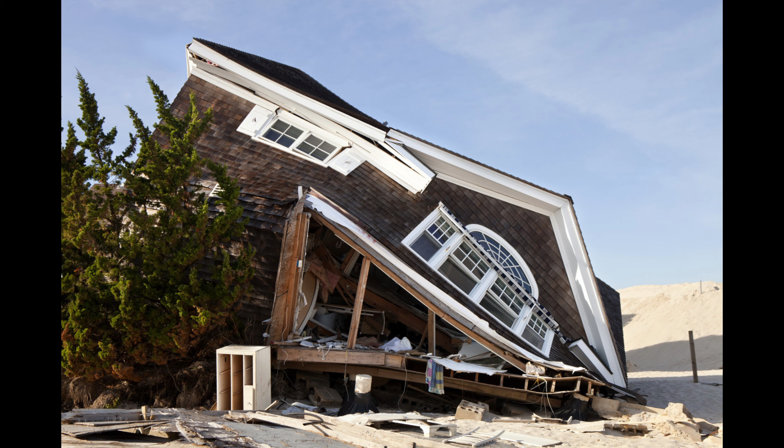When mitigating wind damage, the very first thing you can do to reduce damage to your home, and thus make it safer, is make sure that your home is structurally sound and harden it where necessary. The first step in hardening your home against hurricanes is to strengthen it against the load that will be applied to it by the hurricane's winds. This is accomplished by creating a continuous load path from your roof all the way down to your foundation.

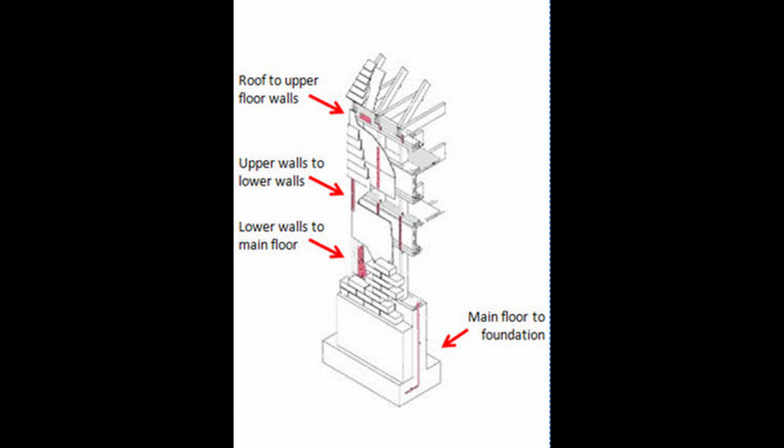This is done by attaching metal brackets and straps to studs and rafters using anchoring bolts, securing your roof to your upper walls to your lower walls to your main floor, and your main floor to your foundation. This will transfer the load the wind puts on your house into the ground. Roofs are a common failure point during a hurricane, and once the roof is breached, wind can more easily destroy the rest of the building, even if it has a continuous load path.

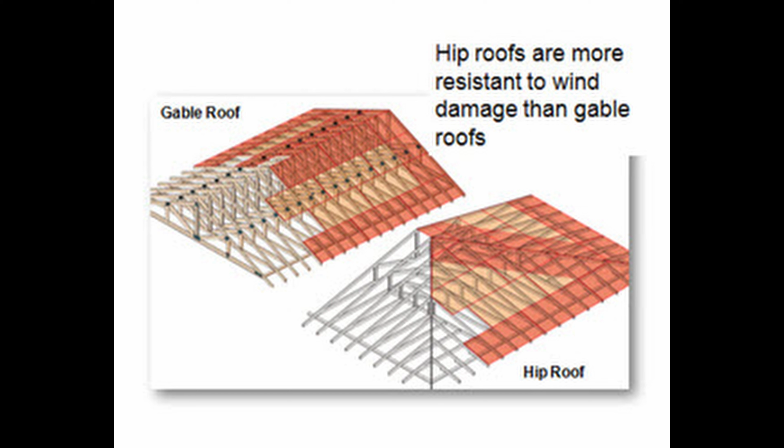So the next most important thing you can do to harden your house is make sure that your roof is structurally sound. Roofs come in two types: hip roofs and gable roofs. Hip roofs are sloped on all sides, thus having a lower profile and generating less wind resistance. So if you're buying a new home, building a new home, or replacing your roof, you'll be best served by a hip roof if high winds are a significant concern in your area of operations.

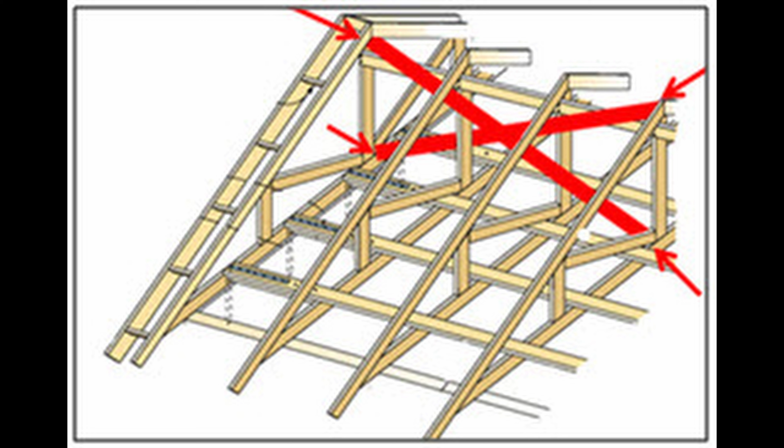Gable roofs are only sloped on two sides, and thus have more surface area that generates greater wind resistance. Gable roofs are prevalent and may be necessary where excessive snow buildup is a major concern. If you have a gable roof, it can be reinforced by bracing its frame. Gable bracing often consists of 2x4s placed in an X pattern at both ends of the attic.

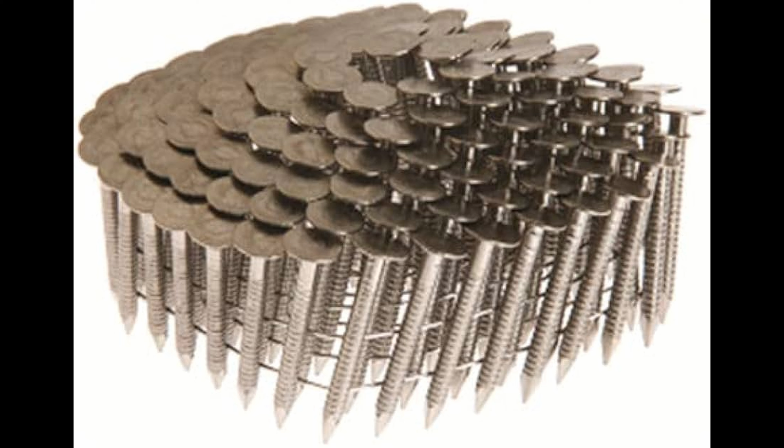But whatever type of roof you have, it would be in your best interest to have a certified home inspector confirm that whatever material your roof is made out of is properly layered and affixed to stand up to high winds, as well as complying with all applicable building codes. Also, specifically ask if your roof was constructed with stainless steel nails if you're within 3,000 feet of salt water.

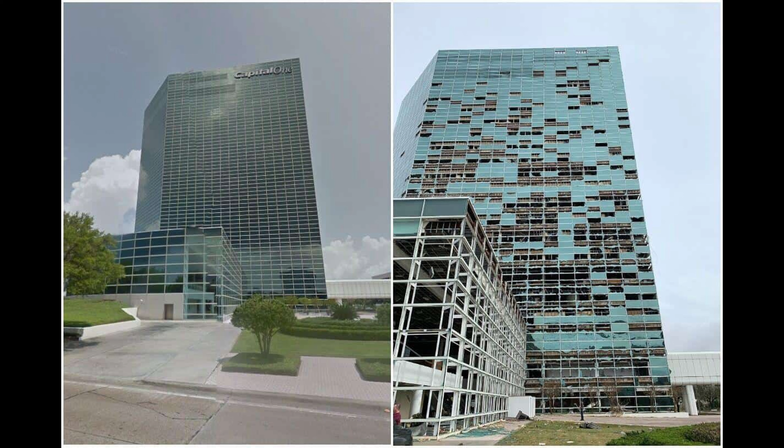Next up for hardening your home is reinforcing your breach points. And a lot of this stuff is not only effective at protecting against winds from both hurricanes and tornadoes, it's also effective at protecting against intruders as well. Exterior doors and windows are the weakest part of a structure's outer shell.

If they're broken or blown in during a hurricane, high winds can enter a structure, exerting pressure on the roof and walls, resulting in serious damage, if not total destruction, as well as letting in water and debris that can further damage the building and the people inside.

Your garage door is the largest potential breach point on your house. Reinforcing your garage door with metal bars and brackets will help protect the garage and its contents, as well as the entire home structure by increasing its resilience to high wind pressure.

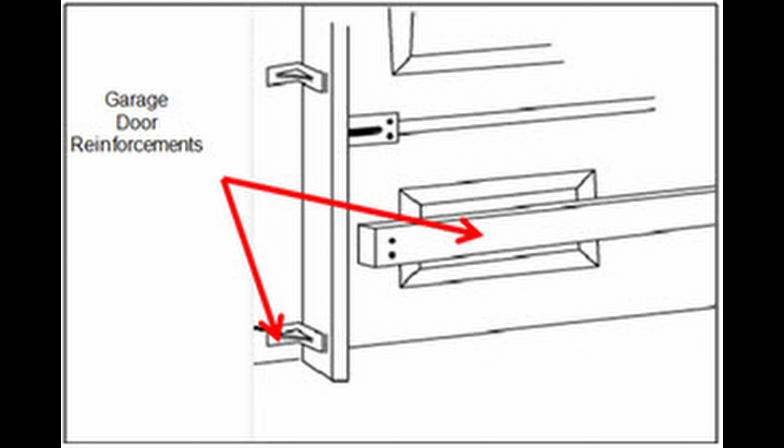Double entry doors also pose a serious risk. Any design of double door can be secured with latches at both the top and the bottom of the door to prevent them from being blown in by high winds.

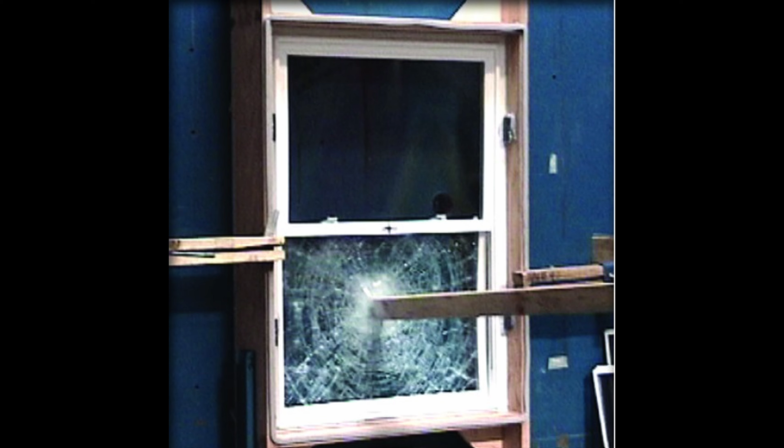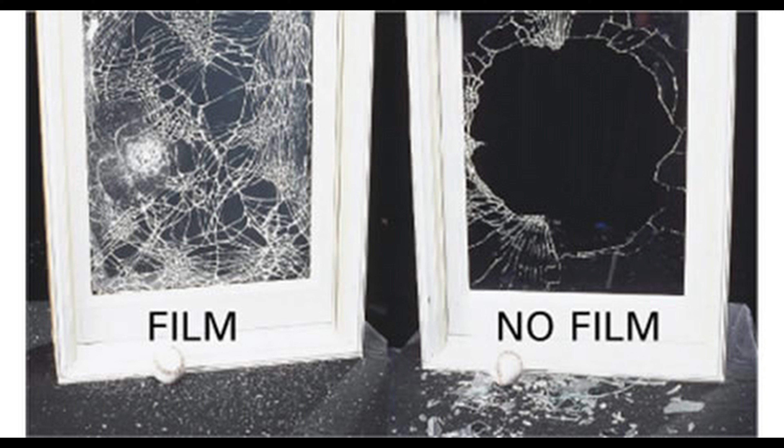Windows are the third largest, but likely most fragile breach point on your home. Windows can be hardened in 4 ways. The first way is installing impact-resistant windows made out of materials like acrylic or polycarbonate. The second way is installing ballistic film over the current existing windows. The high-end versions of these films can even make your windows bullet-resistant.

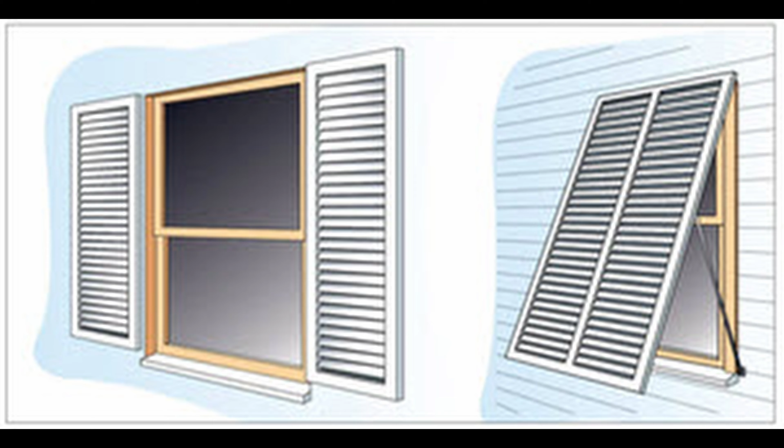The third way to harden your windows are with functional shutters. These range from wood shutters that can close over the glass windows and securely latch, all the way up to rolling metal storm shutters that lock into place.

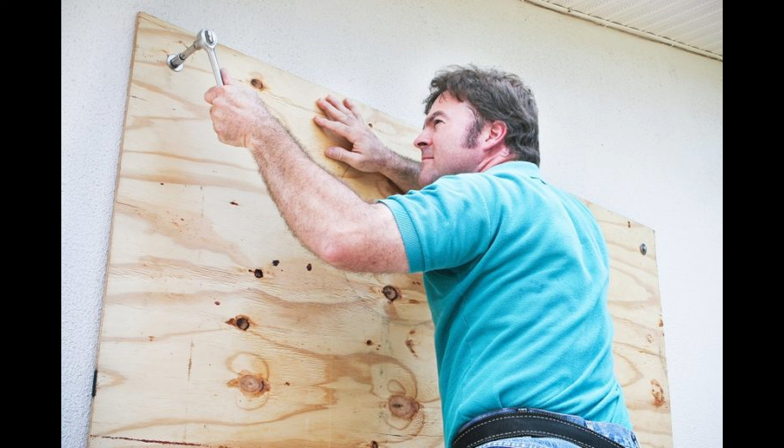The fourth and final way to harden your windows, if a storm is coming and for whatever reason you didn't take advantage of any of the previous methods, is good old temporary plywood coverings. But if you need to resort to this method, just make sure that you use screws or lag bolts long enough to penetrate the wall studs around the window, and not just your siding or wall covering.

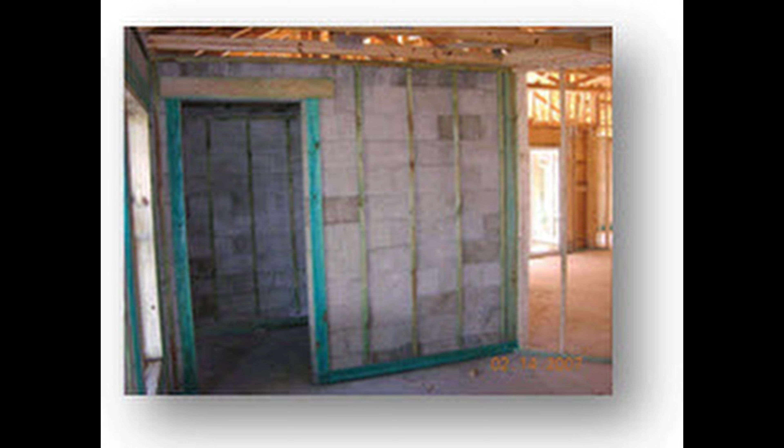Beyond hardening your home, there are a few other things you can do to protect your family and your home from wind damage. First up is installing a storm shelter. A storm shelter built to the standards laid out in FEMA Manual 320, Taking Shelter from the Storm, link in the description, provides near absolute protection against the risk of injury or death caused by extreme wind and flying debris.

However, always remember, storm shelters do not protect against flooding, so always follow flood evacuation orders, even if you have a storm shelter. The next thing you can do is ensure that nothing on your property will turn into flying or falling debris. Trees and unattached secondary buildings pushed over or picked up by high winds can cause damage to other structures during the storm.

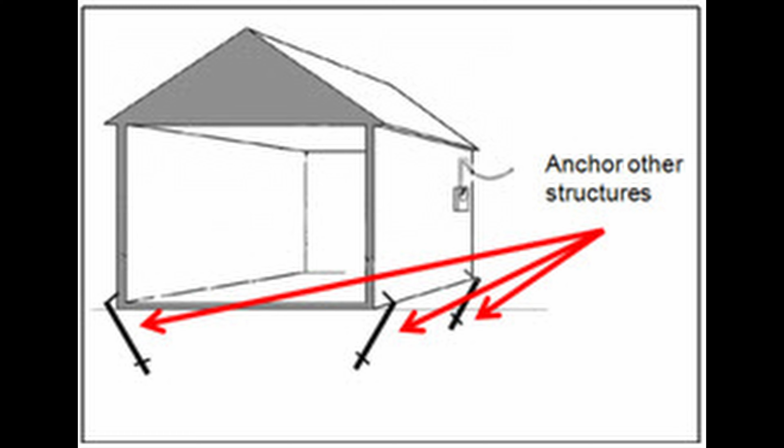Anchoring storage sheds or other outbuildings will help prevent them from becoming flying debris. Anchor straps like those used in manufactured homes can be used to anchor these buildings as well. Additionally, removing all trees close enough to fall on any building on your property reduces the risk of damage to your home from a falling tree, as well as from an outbuilding being crushed and turned into easily blown around debris. The distance between any building and any tree should be greater than the height of the tree when it's fully grown.

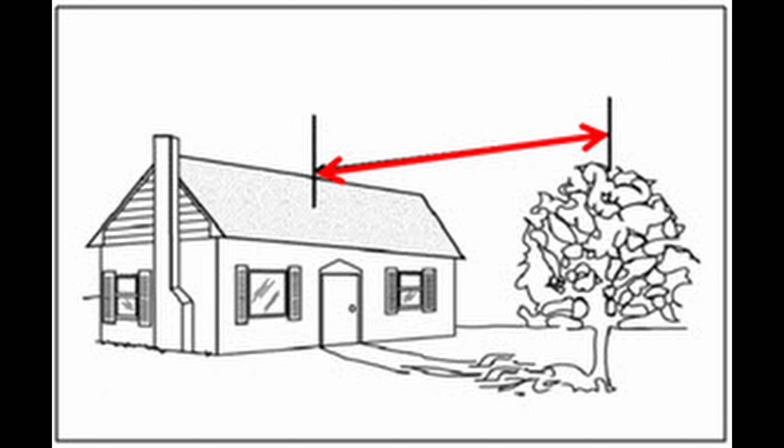Additionally, keeping trees pruned so wind can blow through the branches, instead of the branches acting like a giant sail, can help the trees stay rooted and not fall over in the first place.

Now that we've hardened your home and protected you from falling and flying debris, next we need to talk about floodproofing. By definition, floodproofing describes mitigation measures that decrease the risk of flood damage to structures. Floodproofing measures are generally designed to protect individual components of a structure, not to bring the structure into compliance with a community's floodplain ordinance. And when it comes to floodproofing, there are 2 types: wet floodproofing and dry floodproofing.

Wet floodproofing is any measure applied to a structure and/or its contents that prevents or reduces damage from flooding while allowing floodwaters to enter the structure. Wet proofing measures are typically used to protect the electrical, heating, ventilation, and air conditioning utility components of your house when flooding occurs. Many of these mitigation measures involve elevating equipment above the expected flood levels.

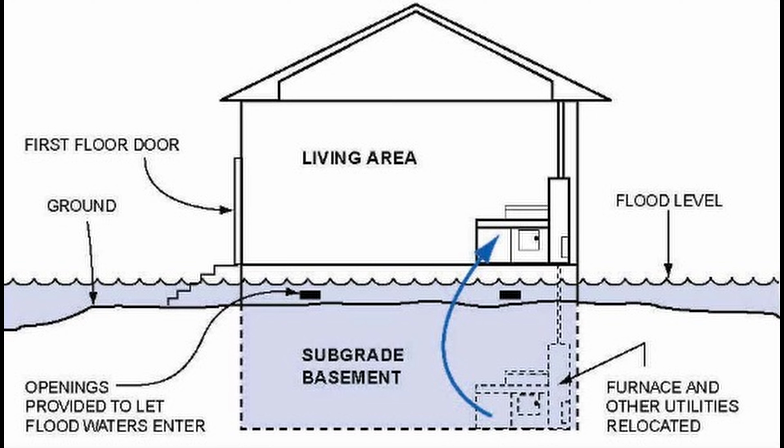Floodwater can easily damage electrical components including service panels, meters, switches, and outlets. Electrical components usually have to be replaced even if they're only inundated for a short period. Furthermore, people don't think about it when there's water everywhere, but short circuits and flooded systems pose a significant risk of setting the portion of your house that's not underwater on fire. This is why it's recommended that if you're evacuating during a hurricane, that you turn off your home's power at the breaker.

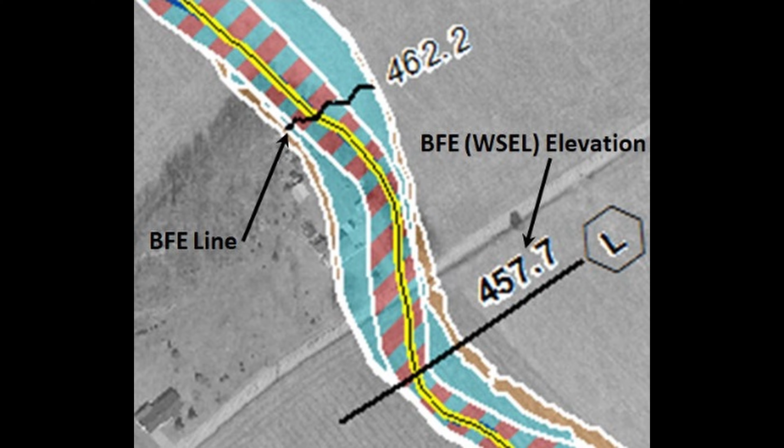FEMA has flood maps that indicate anticipated water levels called base flood elevation, or BFE. The BFE is the anticipated elevation above mean sea level that the base flood is expected to reach. The base flood is a flood that has a 1% chance of occurring in any given year. So check your area's BFE to identify how high you will need to elevate your components when wet floodproofing your home.

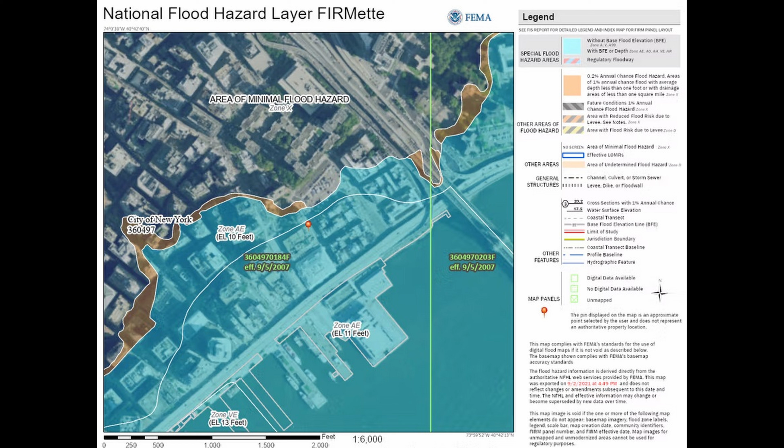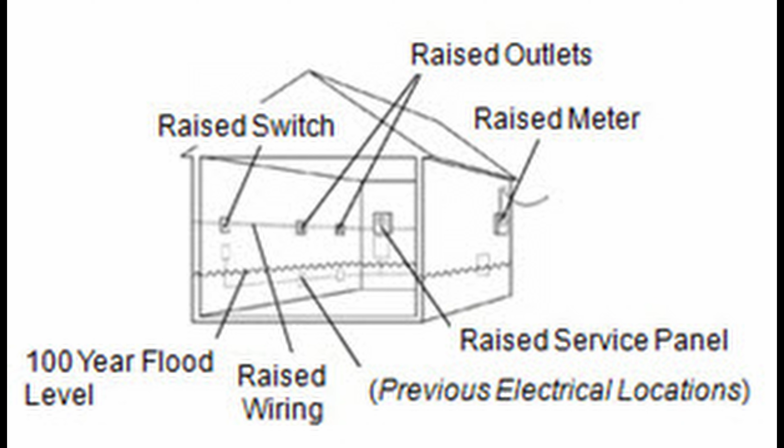You'll want to raise all components of your home's electrical system, including wiring, above the base flood elevation. But the further you raise those components above the BFE, the more you reduce your risk. FEMA strongly recommends only using licensed contractors to ensure that electrical system modifications are performed correctly and in accordance with all applicable codes.

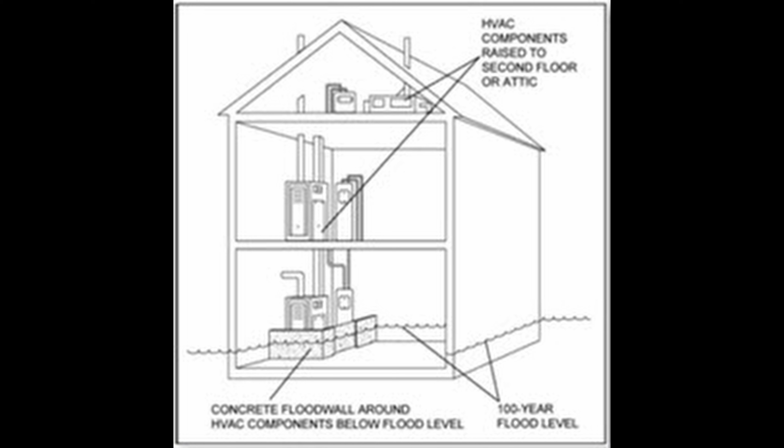HVAC equipment such as furnaces and hot water heaters can easily be damaged or destroyed if inundated by floodwater. So a good way to protect HVAC equipment is to move it to your home's upper floor or attic instead of having it in your basement, where flooding could put them completely underwater. Your ventilation ductwork can also be protected from flooding by moving it above the BFE to the extent possible.

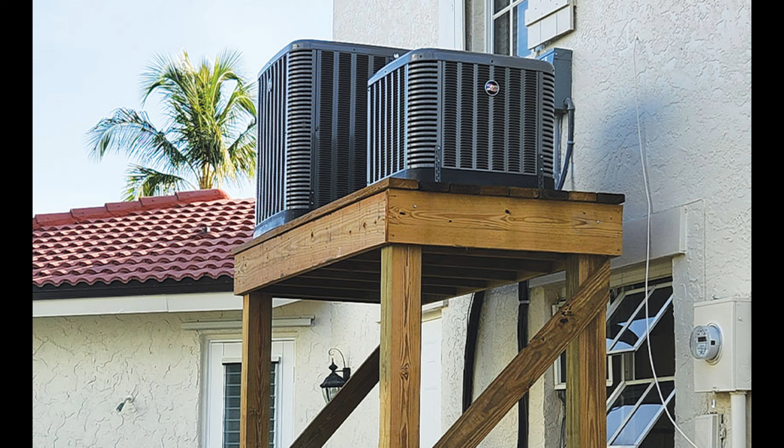In addition to elevating large utilities, major home appliances like washing machines and dryers can be protected by placing them on floors in your home above your BFE. Likewise, outdoor utilities like heat pumps and air conditioners can be protected by placing them on elevated platforms above your BFE.

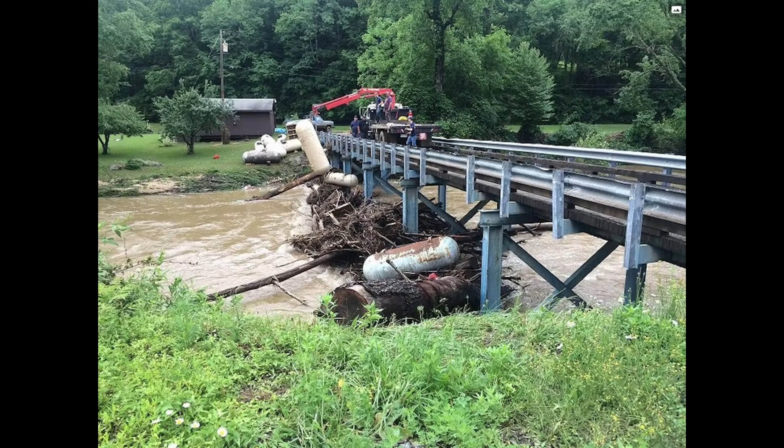Finally, if you have external heating oil or propane tanks, you'll need to secure them by running straps over them and attaching the straps to ground anchors. These kinds of tanks can easily be moved by floodwater, and not only will losing these tanks be a major cost and inconvenience for you, but it can generate a serious threat to public safety.

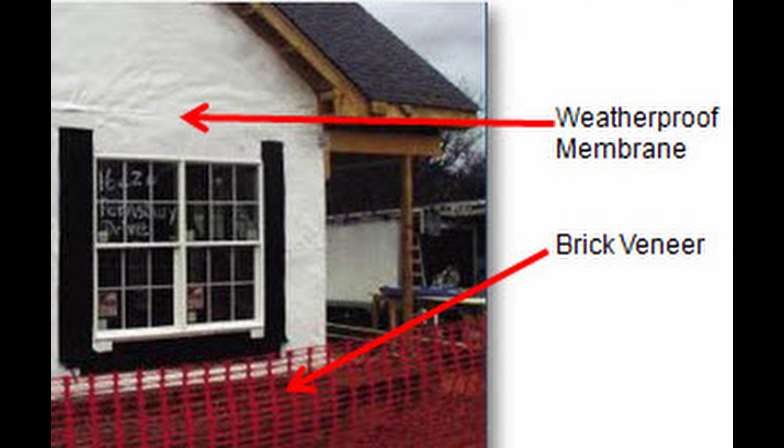Now, as for dry floodproofing, this, by definition, includes measures that make a structure watertight below the level that needs flood protection. This type of floodproofing is often used to protect non-residential structures, water supplies, and sewage systems. An example of a dry floodproofing measure is to apply a waterproof veneer, such as a layer of brick backed by a waterproof membrane, directly to the outside surface of an existing structure.

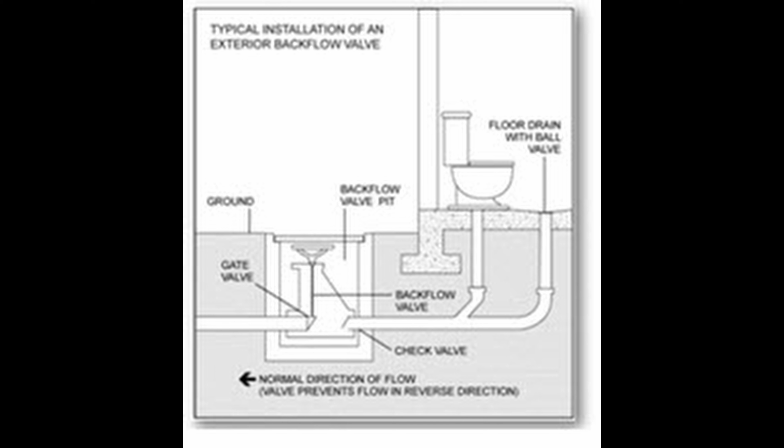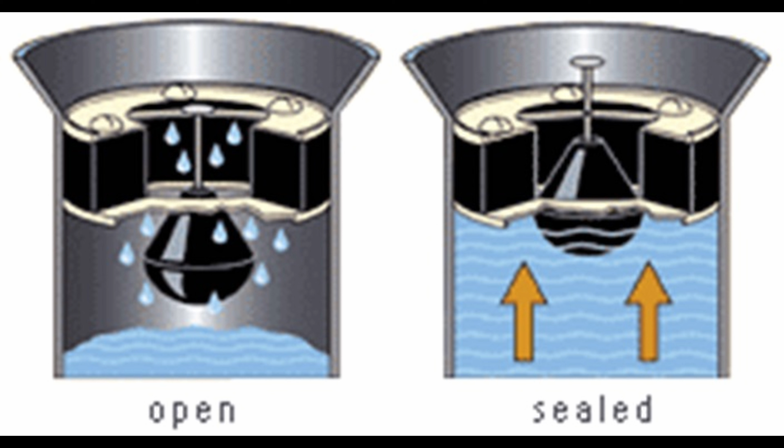Additionally, flooding can cause sewage from sewer lines to back up through drain pipes. These backups not only cause damage that's difficult to repair, but they also create health hazards. One way to protect against this hazard is to install backflow valves, which temporarily block drain pipes if water travels through them the wrong way. If your house's lowest level has a floor drain that empties outside, installing a floating floor drain plug can also prevent floodwater from backing up the drain pipe and entering your house.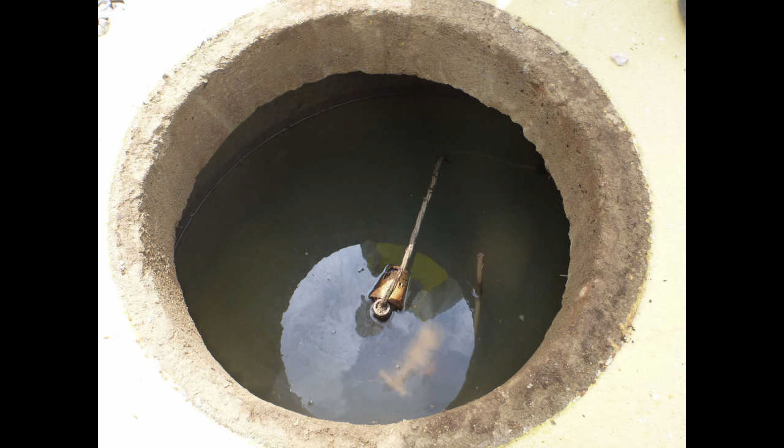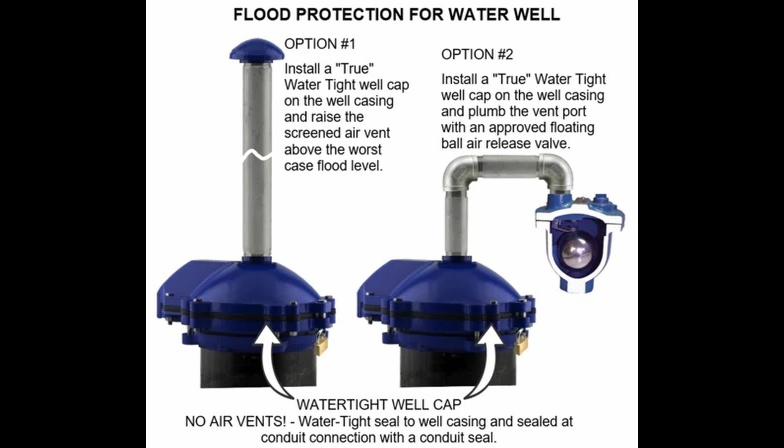Floodwaters often carry hazardous and toxic materials, including raw sewage, animal waste, oil, gasoline, solvents, and chemicals. If your home's water supply comes from a well, floodwaters entering that well can contaminate the groundwater, making the well unsafe. Wells suspected of being contaminated should be inspected by a professional. Proper well construction will protect a well from contamination.

A licensed well drilling contractor can inspect your well and suggest improvements such as extending the casing at least 2 feet above the highest known flood elevation, installing a sanitary seal or cover on the casing, and/or installing a backflow valve in the water line.

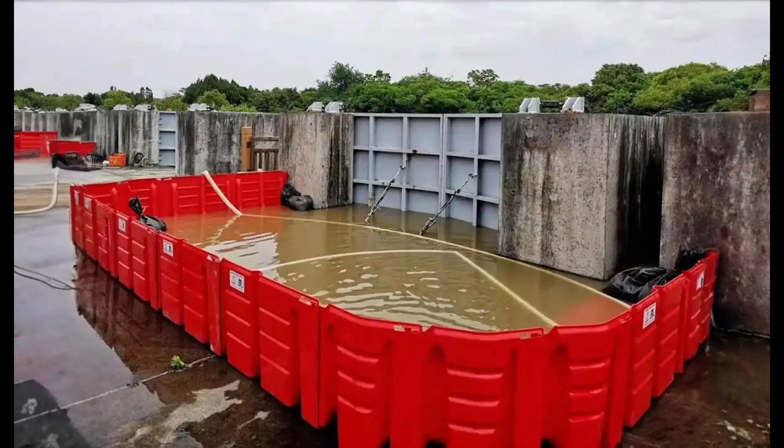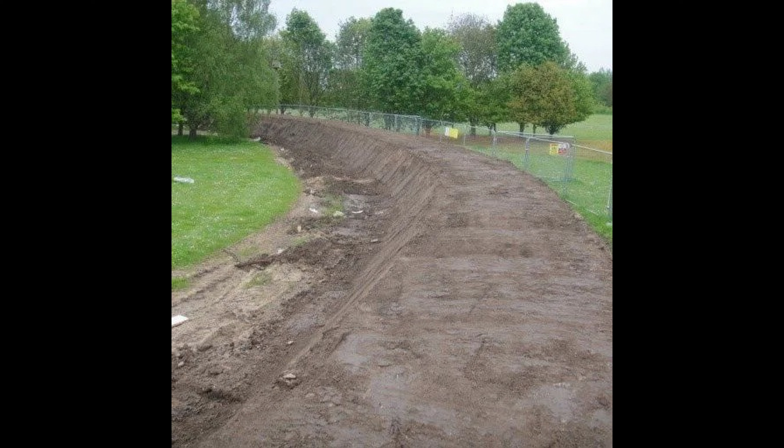The last form of floodproofing you can use is flood control barriers. These barriers include levees, berms, flood walls, and temporary barriers. Flood control barriers protect structures by deflecting the destructive force of floodwaters away from them, and thus can be used to create a protected area around your home. But remember that any of the permanent flood control barrier types will need periodic maintenance to remain effective.

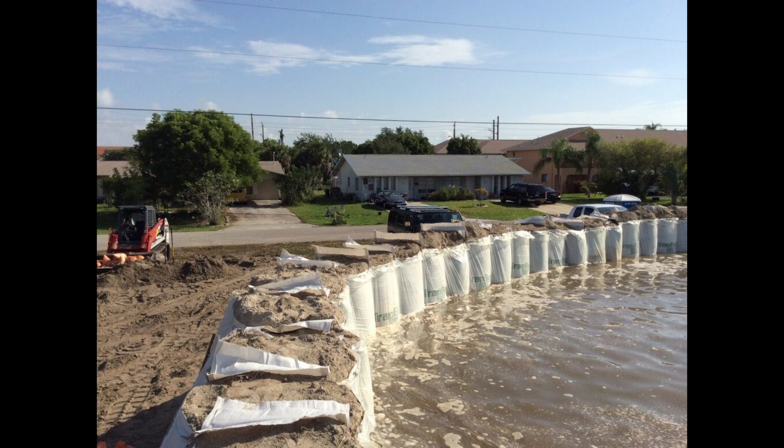You also need to keep in mind that floodwater deflected away from your property may be deflected towards your neighbor's property, causing worse flooding for them, or potentially overwhelming local sewage or drainage systems.

Finally, the last section of FEMA 321 talks about storm surge mitigation. This section really all breaks down to, if you live in an elevated house near the coast, it means you're in the V zone. This means you're at significant risk of damage from storm surge. As such, you need to get a certified engineer to make sure that all of the applicable safety features have been built into your home. And if they haven't, you need to get certified building professionals to bring your house up to code.

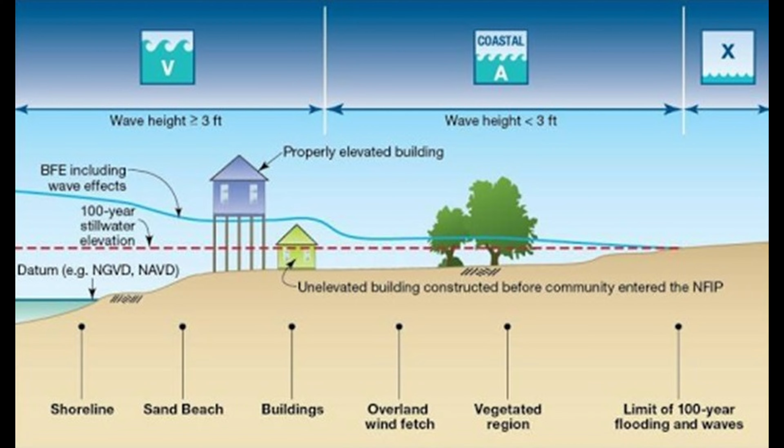So there you have it. If you harden your home against the wind and you floodproof your home against the water, you and your family are far more likely to survive the next hurricane, and your cost of repair and recovery will be drastically reduced.